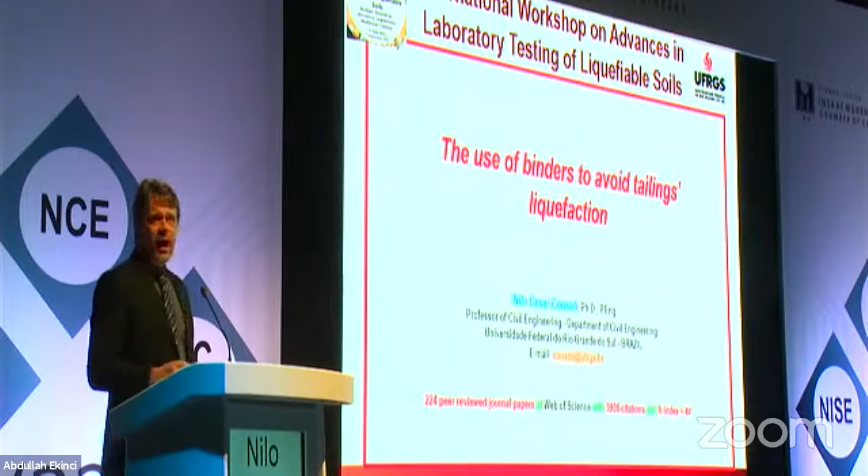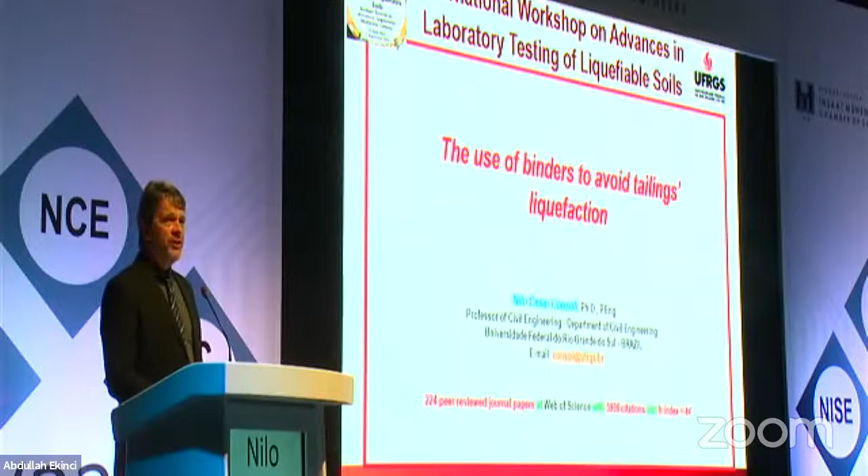And I'm going to show you the problem and the ways that we are trying to solve it. Just for you to have an idea, we have about 800 upstream dams in Brazil, and a lot of them have a safety factor of nearly 1. So we have to decommission all of them, and there is a law that was introduced after the last failure that killed 250 people or more, that forbids, from 2020 on, raising new upstream dams.

So, as I said, we have 800 and we have to decommission them, and we cannot build new ones. They are the cheapest, that's why they were used, but now it's not possible anymore. That's the reason that I'm going to present to you the problem and possible solutions for disposal of new material and ways to decommission these tailings that still have some problems.

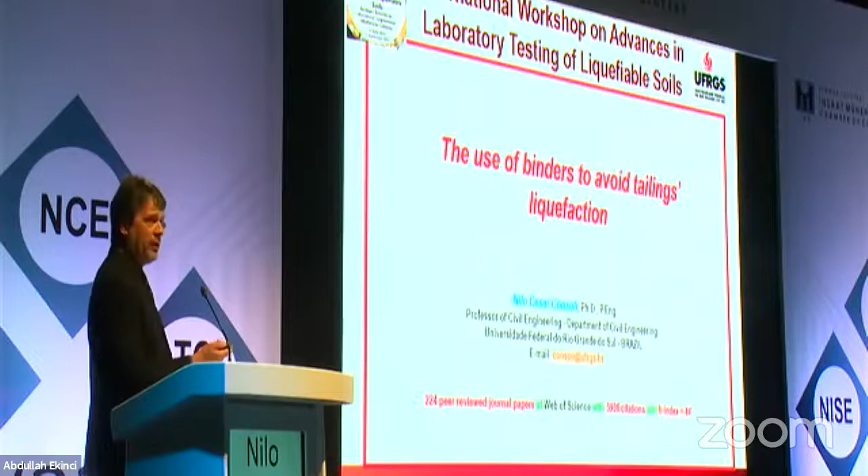The first thing, just for you to have an idea, I have some experience with tailings dating 30 years ago in my PhD in Canada, in which the problem that we had at that time was completely different than the one that we have nowadays. At that time, we didn't know how to manage the volume of tailings that we could dispose behind a dam and a reservoir. So my PhD was regarding this kind of solution, a numerical solution.

So I worked in the development of a constitutive model based on critical state soil mechanics with a former student of Roscoe from Cambridge, Professor Poorooshasb. That's why I chose the university, to work with him. He was the one that started to look at sandy materials from the critical state soil mechanics side, because Schofield, Wroth, and all the others looked mostly at clay materials. That's one of the reasons, because in tailings you have silty and sandy material. So I went after this problem.

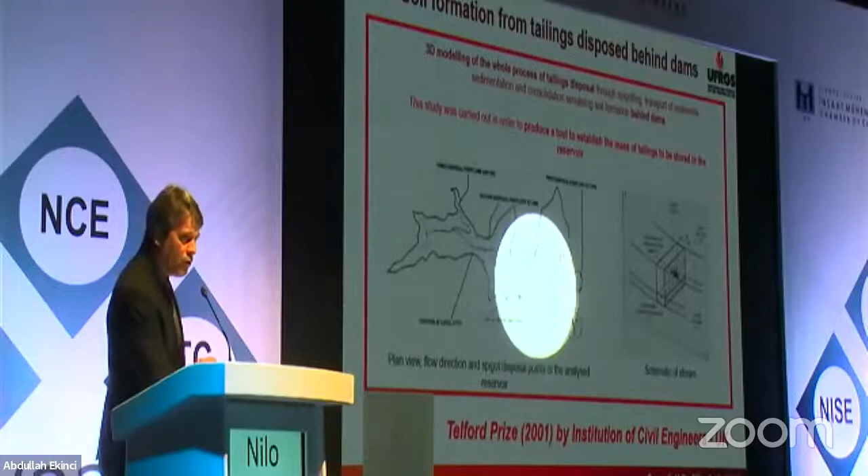And in the end, I published a paper. It was basically a real problem that we had with bauxite tailings, where this slurry was disposed at some point like here, and it starts to be taken by the water, and so you have sedimentation and also consolidation, everything occurring at the same time. So we had to solve it numerically.

At that moment, and even nowadays, you don't have an analytical solution for it. So I had to develop two codes, one in finite difference to deal with the sedimentation, and after that the large strain consolidation.

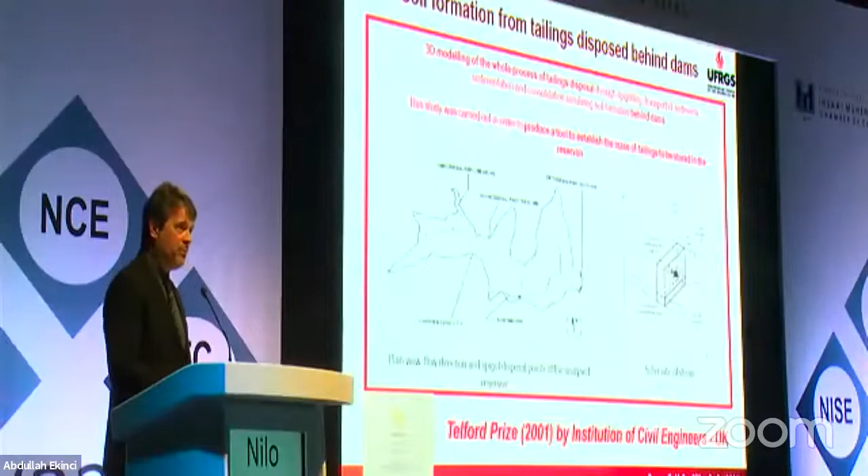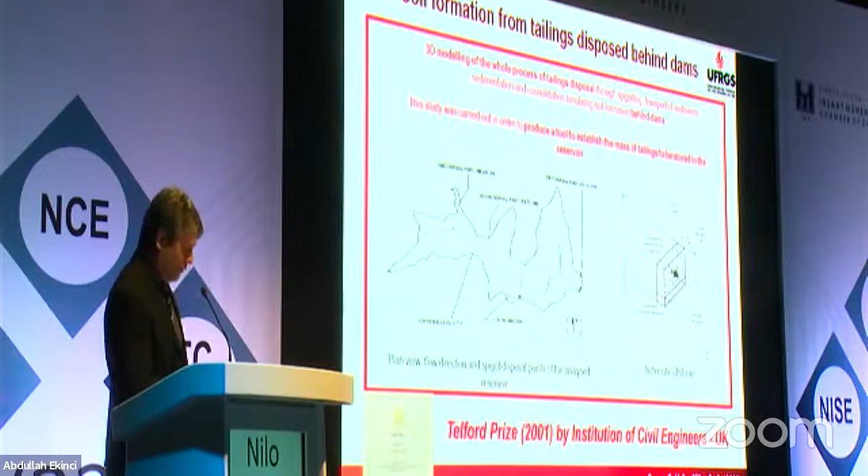And my first paper was published in Géotechnique in the year 2000, and I was lucky to even get a prize for this paper, which was fantastic when I started, just to have it recognized as a good solution for the problem.

Just for you to have an idea, when we're dealing with this bauxite tailings, these dots are results of the void ratio with depth. And the solution, it was a one-dimensional solution, but in the end, at one point, we got this dashed line here as the numerical solution of the final void ratio. So it started with a void ratio of 6 at the top, and it ended with a void ratio of about 3.

So we are dealing with a pretty problematic material if we have any kind of quakes or so, which is not common in Brazil, but even static liquefaction, as we discussed in the last period, we might have problems with this kind of high void ratio and such a material.

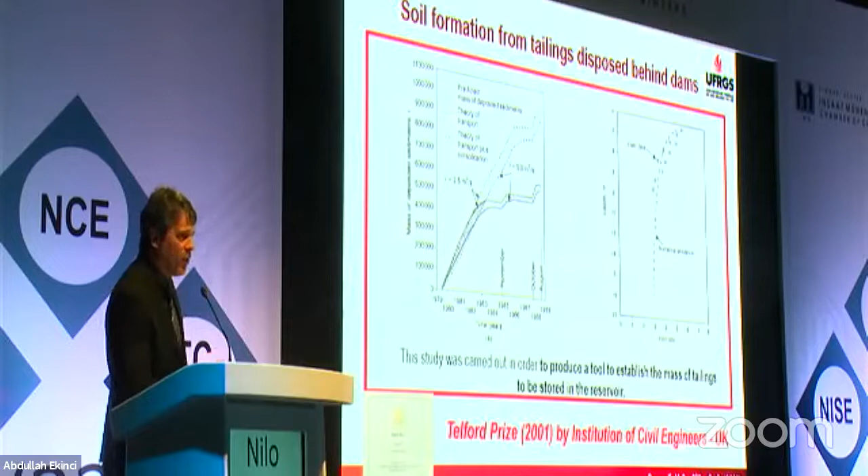But what is interesting also to see here is that due to transport of the material and just sedimentation, we could solve the problem saying that we have a possibility of putting like 500,000 tons of material behind a dam in a reservoir. But if you consider the consolidation, the real consolidated height, considering small, large strains and Eulerian or Lagrangian viewpoints, it almost doubled, and that was what really happened. Almost double the amount of material that you could put behind that dam.

But as I said, this is just the first point that we have had. But recently, as I told you, and this I brought just for you to take a look. This is an iron ore reservoir that was raised with the upstream method. And in 2019, we had the failure. So these are just the sequence of it. And in this one, we had more than 250 people killed. And everything changed from that moment on in Brazil.

Because of that, if possible, there's a link here where you can see the video of this failure. So I just took some pictures to show you what the problem was and why it is forbidden in Brazil to do such a disposal from then on. So as I said, we had to start thinking about novel ways of solving the problem.

And so at that moment, Vale, which is the biggest mining company that we have in Brazil, approached me at university because they wanted to look for solutions using dry stacking, which means you filter the material, the slurry, you get it to a certain moisture content, then you compact in layers, and then you can do, as they expect, these dry stacks up to 300, maybe 400, even 500 meters high.

But then there's also the possibility of adding some cement and starting to compact and going up. Of course, depending on the amount of cement and the level of stresses that you're going to have due to the raise of this stack, you might have breakage of the cement bonds in the layers below. And as I said before, you might have breakage of the particles, mainly the sandy particles. So this is still something we have to understand better, how it's really going to change due to these particularities that we have for such a solution.

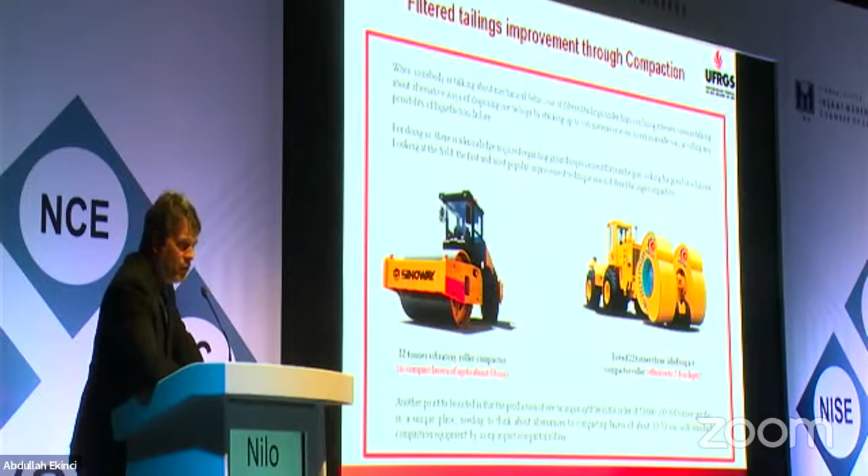But I'm going to show you some of the problems that we are already starting to look at for this solution. The first problem is a practical problem that was raised for us: do you have any problem due to compaction? For example, might you have some breakage of the sandy particles due to high energy, because the equipment that is supposed to be used in the field, and they are already doing it, has huge energy and high frequencies and so on. Would that make any difference regarding possible breakage of the particles?

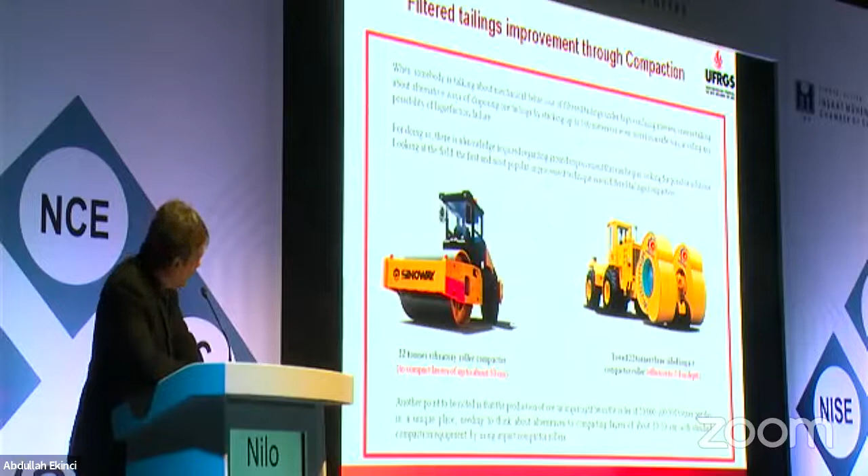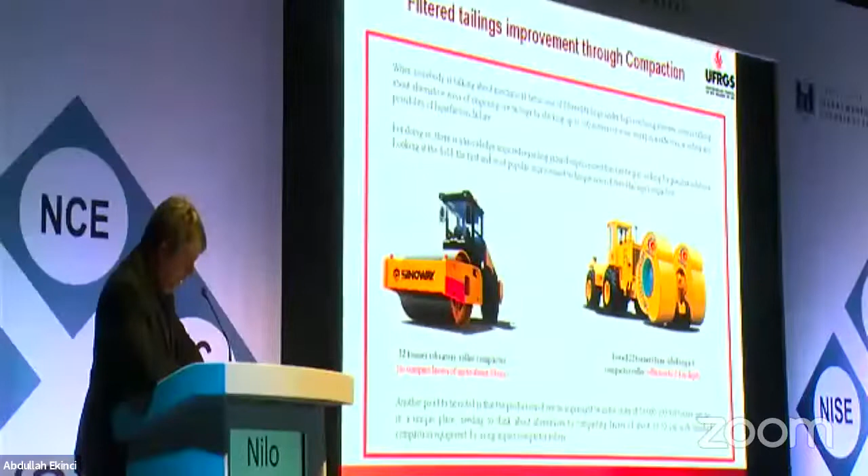We are studying that, and we have done some tests for two different pieces of equipment, in the lab and also in the field, to check it out. In this case here, we have a 22-ton vibratory roller compactor for compacting up to 50 centimeters. And in the other case here, you have an impact roller to compact thicker layers and see what is going to happen. So this is ongoing research that we are doing, and this has not been shown before.

We're still writing something about that, but at this moment, for iron ore tailings in this case, we could not find breakage of the particles due to this compaction, applying the energies that we might have, cyclically or not, up to reasonable pressures. These particles are mainly silica sand, and so they do not break. However, we applied much higher pressures than the ones that you might have in the field, and then, yes, you do have breakage, but that's not real.

We had to check if it was going to occur and which were the pressures to do so. But the good news for Vale, which was paying for this research, is that for the usual pressures that you get from these equipments, you don't have a change in the size of the particles due to compaction for this material. This is something good technically for them.

Okay, but what about if we are looking at real high pressure due to the stacks being 300, 400, or even 500 meters high? What's going to happen to the material that is below when you are raising it? This also hasn't been shown anywhere. It's just an initial result, in which we have two different materials. Both come from iron ore tailings, but they are retrieved from the process at different moments. One of them is mainly silt, and the second is mainly sand.

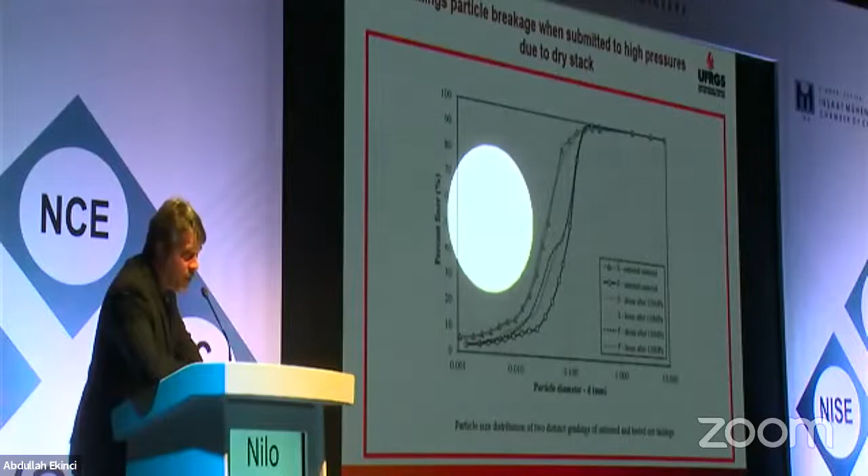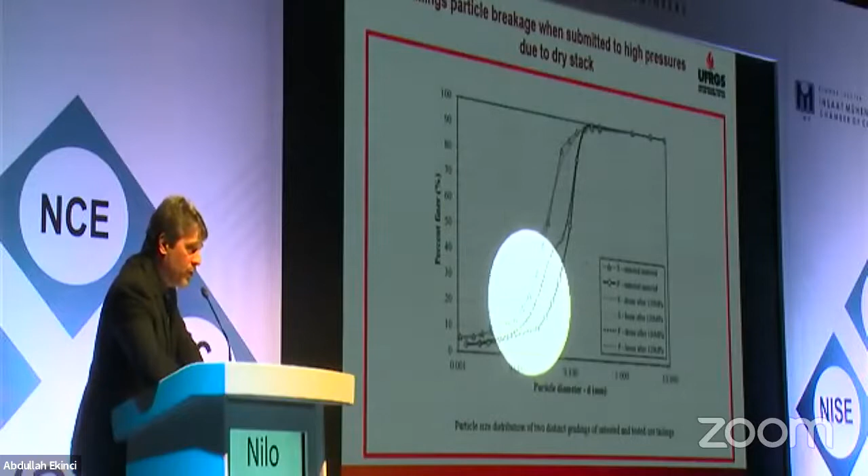These on the top are the results for the silty material, which are similar before and after applying such a high stress like 120 megapascals. But here in the bottom, you have the materials that were compacted initially in a dense way or in a loose way, and in both you have breakage of the particles, and so you have smaller size particles. And we are looking, of course, at the real situation too, and that's still ongoing research.

But as I told you, the concept that we have in Brazil, which differentiates from 2020 and on, is this idea of using dry stack. And in such a case, at this moment, they have already decided that we shall go at least to 300 meters high in stacks, which, as I told you, we have some specific knowledge that still has to be studied. There are some points that have to be clarified about possible particle breakage and other points that you might need to understand it all.

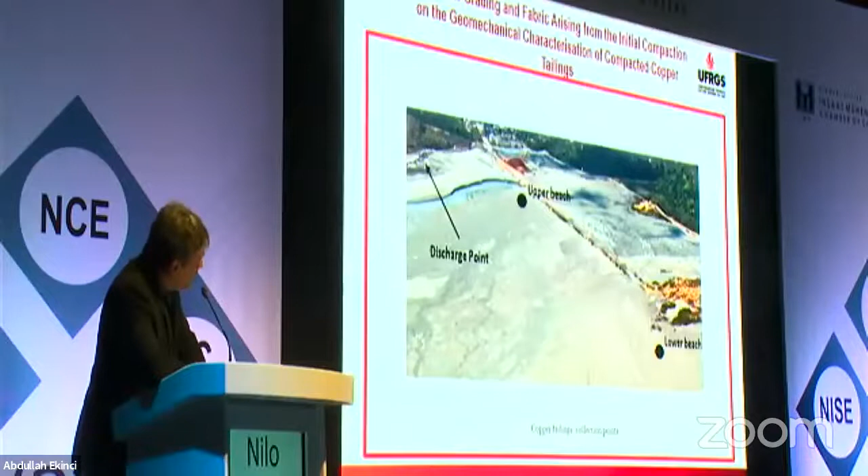Here is a paper that was just accepted at Geotechnique. It's still not printed, but it's going to be soon ahead of print, in which we have a decommissioning kind of problem. So this is a reservoir for a copper tailing, and we have got specimens from, here's the discharge point, from what we call upper beach and from the lower beach. Of course, the difference is basically the size of the particles: in the lower beach, due to the transport of sediments, they are smaller than the ones in the upper beach, which is interesting, and we see here just the difference. Both are silty sands, but they have some differences in the amount of silt, basically.

Here we have plenty of results, drained and also undrained, and we have analyzed these results, in this case here, just for the upper beach material. We have made the decision of looking at 3 different compaction energies. So we have different densities of initial void ratio. So in 3 different ways, and we want to look at the influence of the void ratio regarding liquefaction or things like that, what is going to happen, and also from the critical state soil mechanics viewpoint. What's going to happen?

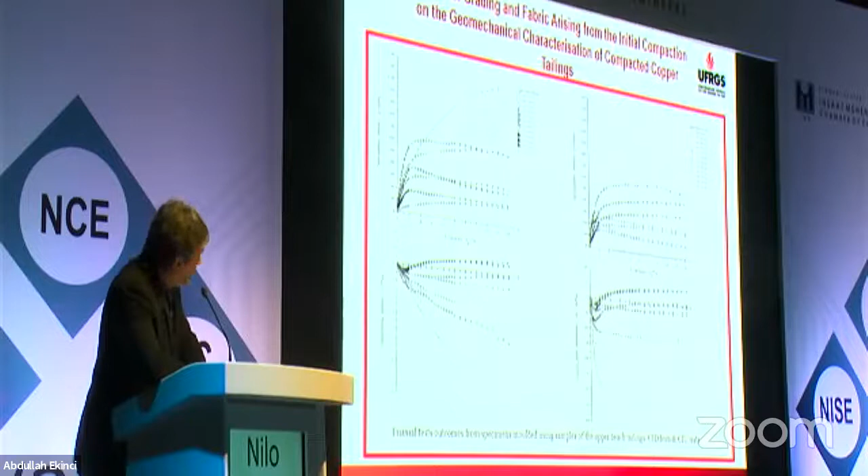Okay, this is just the isotropic results from these specimens. These on the top have a void ratio compared to about, if I'm not wrong, 86% of the maximum density, and these are just the isotropic points in the beginning of the shear, before shearing it. So what is interesting is that this is for 86% of the energy that is applied, so a lower density. This is an average density, which is 91% of the maximum density, and this one is for 95% of maximum density. Anyway, we have 3 different straight lines. At least we have approached to this.

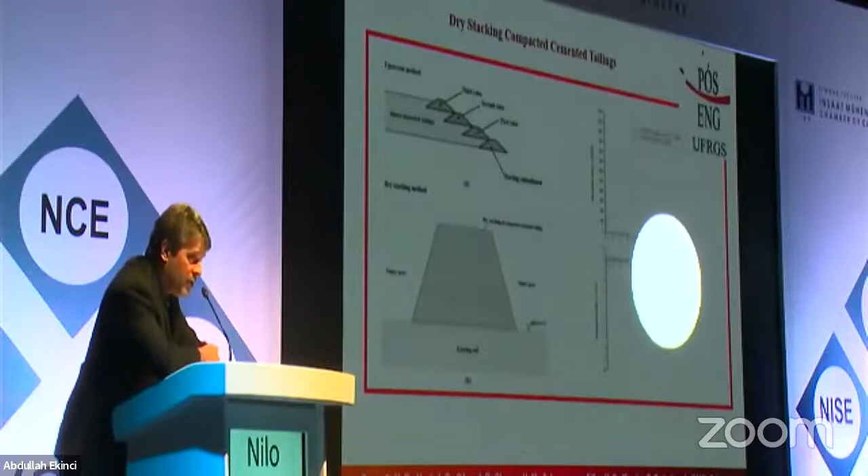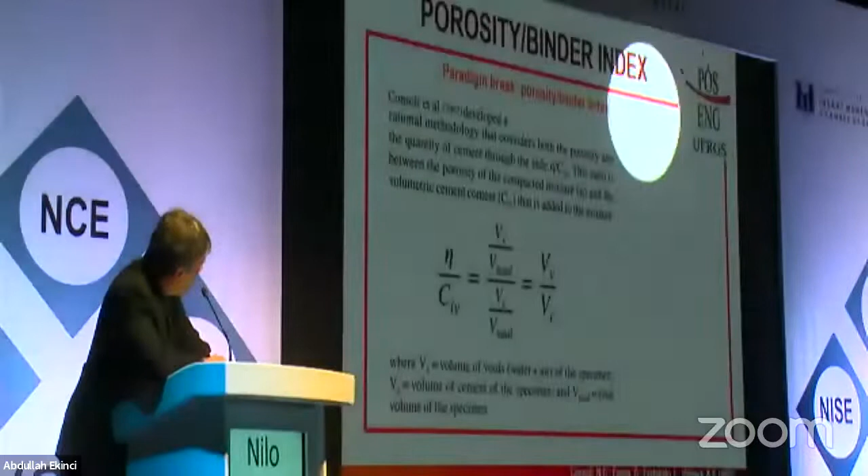Here's something that I know Abdullah and some of the people here from Turkey and Cyprus and some other places in the world are already using. As I'm going to talk a little bit about cementing the material, it's interesting to show the concept of this index, which is porosity divided by what we call the volumetric amount of cement, the eta/Civ. It started with some research in the middle of the 2000s.

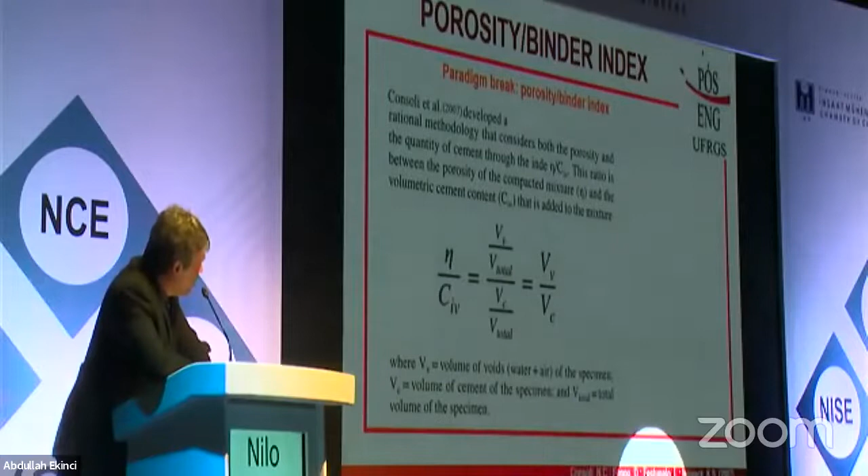This paper from 2007 is the most cited paper that I have. It was published in the Journal of Geotechnical and Geoenvironmental Engineering, and at this moment it has 313 citations on Web of Science. And what I'm going to show you now is that this index controls unconfined compressive strength, splitting tensile strength, initial shear modulus, initial bulk modulus.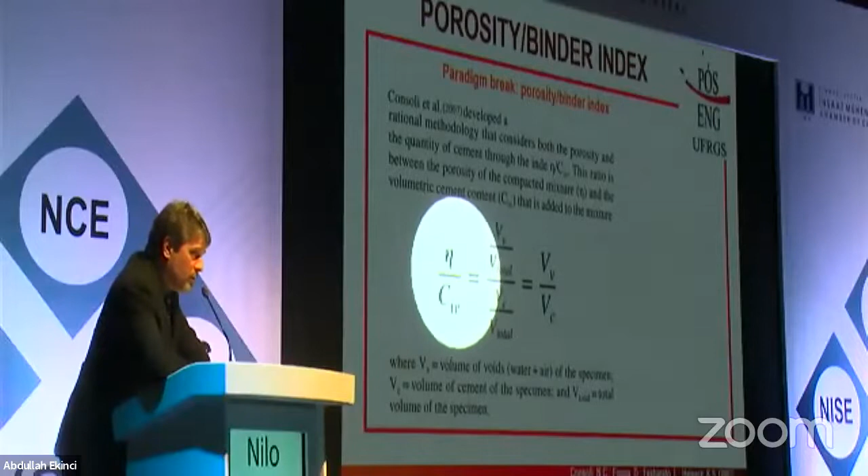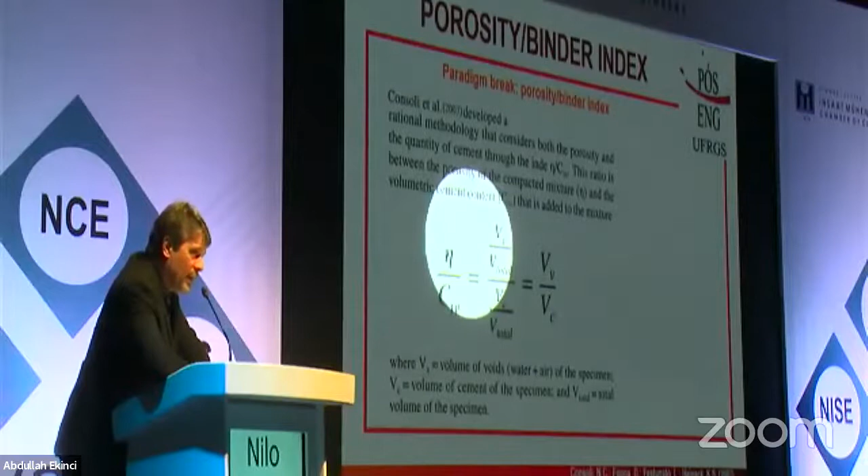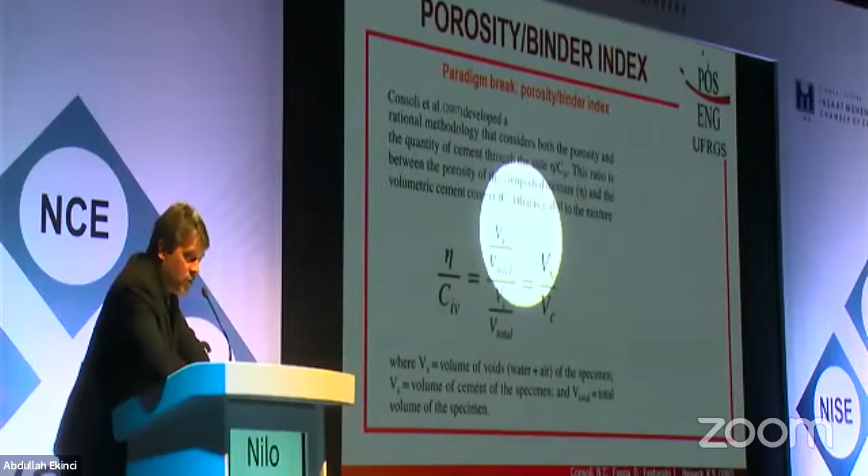It controls the peak of triaxial tests. It controls durability, the loss of mass. It controls the expansion of clay that has some expansive minerals. We can also control the amount of expansion that you might have through this index. Here are just some basic ideas that we have, just the concept of how to look at it.

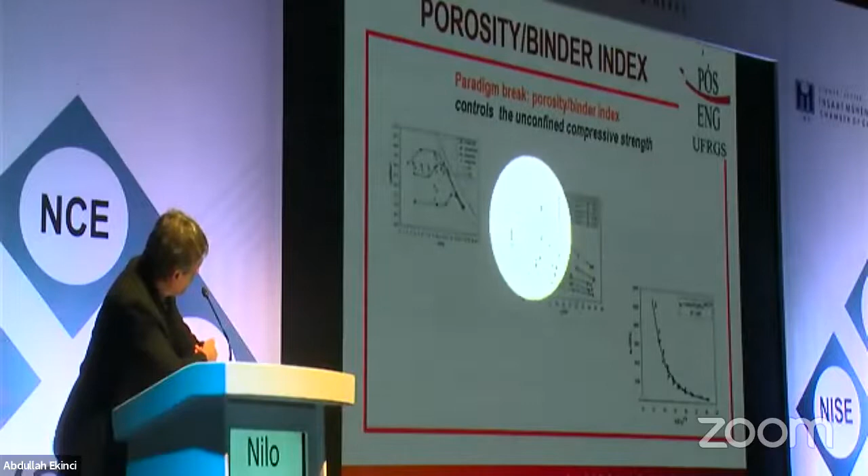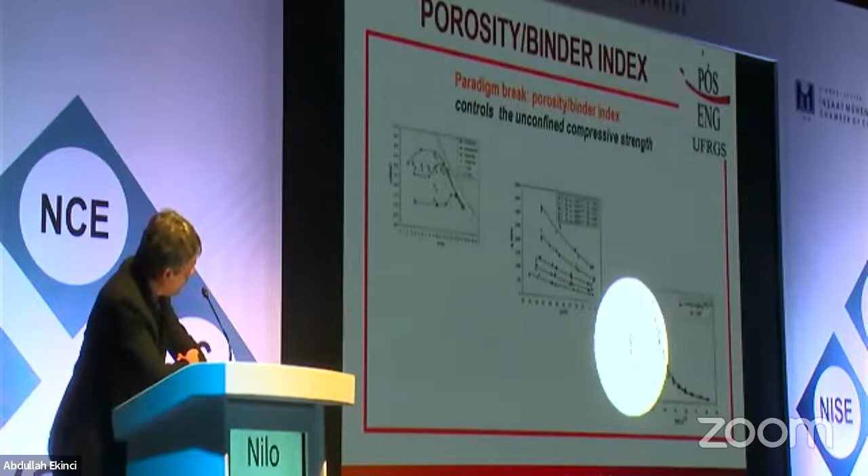For example, here are several energies of compaction. We can make some molds at several points. We get, for example, with several amounts of cement, the unconfined compressive strength as a function of porosity with different amounts of cement. But in the end, what we show is that with that index, the unconfined compressive strength can get to a unique line. Okay.

Here is joint work that was carried out with the University of Bristol, with Professor Erdin Ibraim, Professor Andrea Diambra, and myself, in which the study was to have some analytical basis for that index, because we knew experimentally that it was working. But with this and some other further works published from 2017 on, we have the analytical proof for why that index really controls these cementitious materials. I'm not going to enter into details, but as shown here, it was published in the Journal of Geotechnical and Geoenvironmental Engineering in 2017.

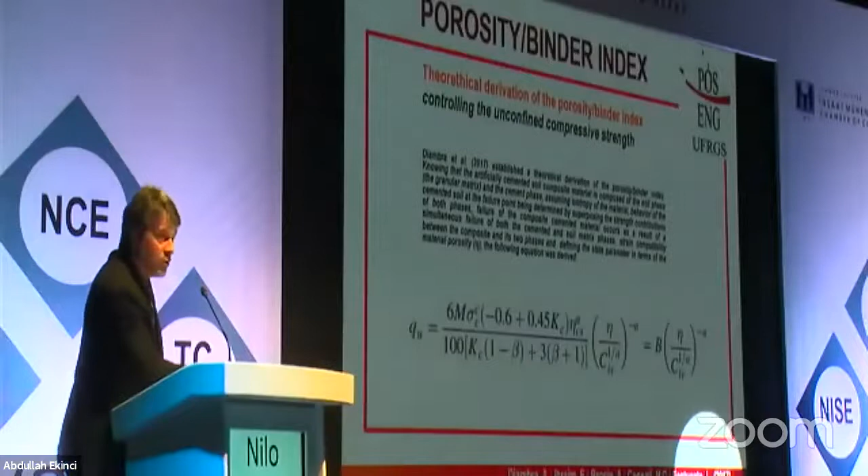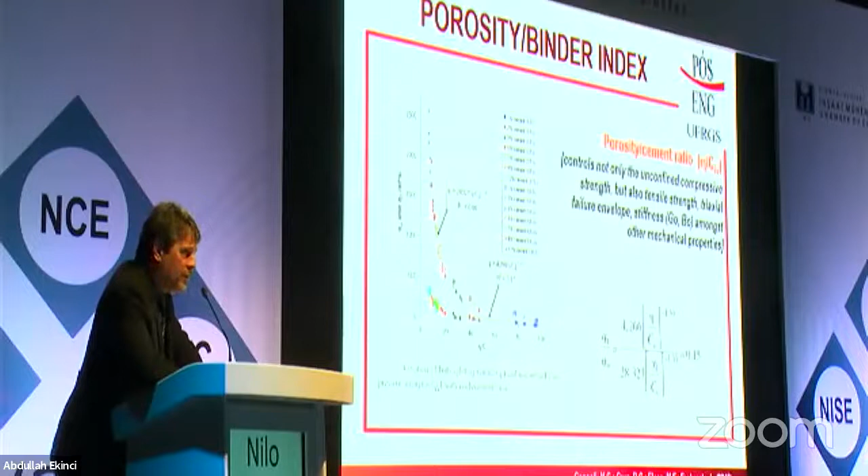This is also a paper from the Journal of Geotechnical and Geoenvironmental Engineering from 2010, in which for the first time we showed that for the unconfined compressive strength and also the split tensile strength, using different void ratios and different amounts of cement, you would get a unique curve for unconfined compression and a unique curve for tensile. And if you get these curves and divide one equation by the other, you get a scalar that is unique and doesn't change with the amount of cement or the density. So it's quite interesting. As I said, it was published in 2010.

Let's go on. This is a paper published in 2012 in Géotechnique, in which we introduced for the first time the concept that the initial shear modulus, measured through bender elements or ultrasound equipment depending on where you are doing it, is also dependent on this eta/Civ index.

So you have different materials: these were sandy material from Brazil, and this was a sandy material from Portugal. They have been tested by different people, but as I said, you have a unique curve for one material with one cement, and for the other you have another curve. But each curve is, as I said, controlled by this index.

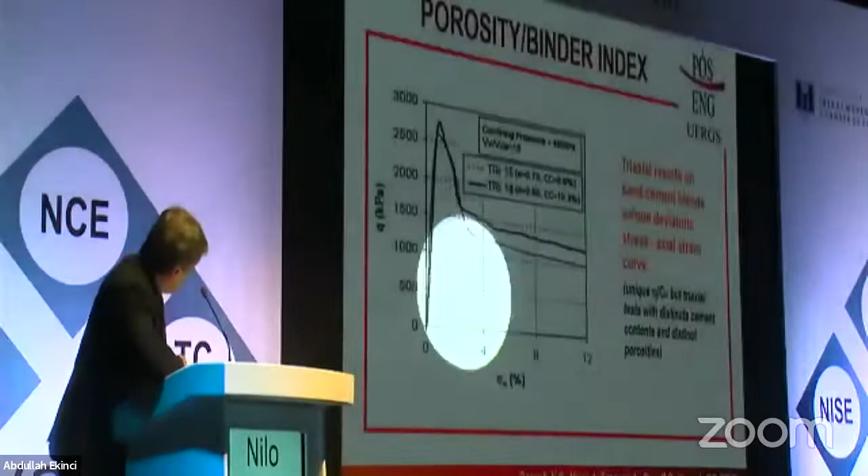Here is something also interesting that was published in 2009 already, showing that if we have, for example, these triaxial tests that were molded with different void ratio, different amount of cement, but the same eta/Civ, the same index, under a specific confining pressure, they have the same behavior from beginning to the end. You can see the whole curve is the same, even though the void ratio and the amount of cement of both specimens are different. However, they have the same index.

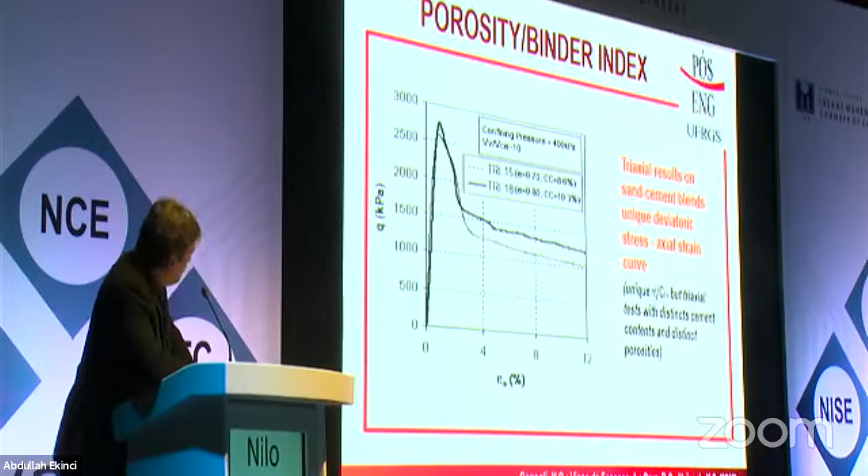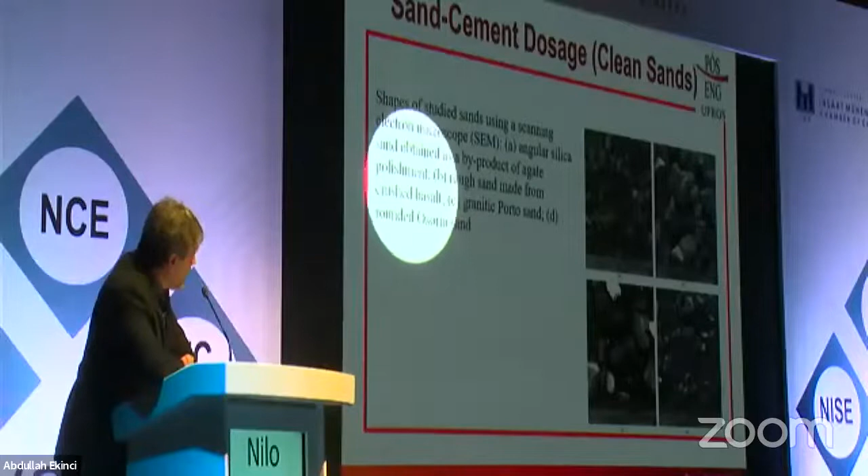This is also something that was published in the Journal of Materials in Civil Engineering from ASCE in 2017, in which we have shown 4 different granular materials. Some are man-made, some are real ones. For example, this is a material from Porto. This is Osório sand from Brazil, and these 2 materials are recyclable residues of the polishing of agate, which is a kind of stone, and also some materials based on the rest of crushed basalt. But anyway, they are all sandy-size particles, but they do have, as we can see here, quite different angularities and roughnesses too.

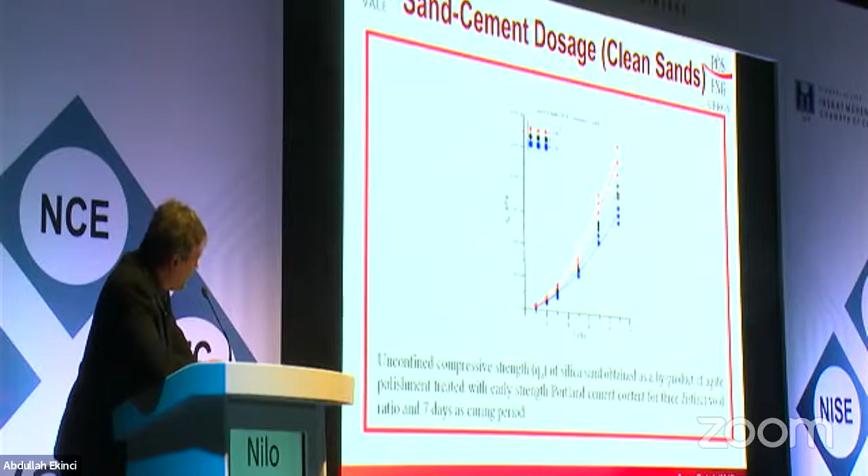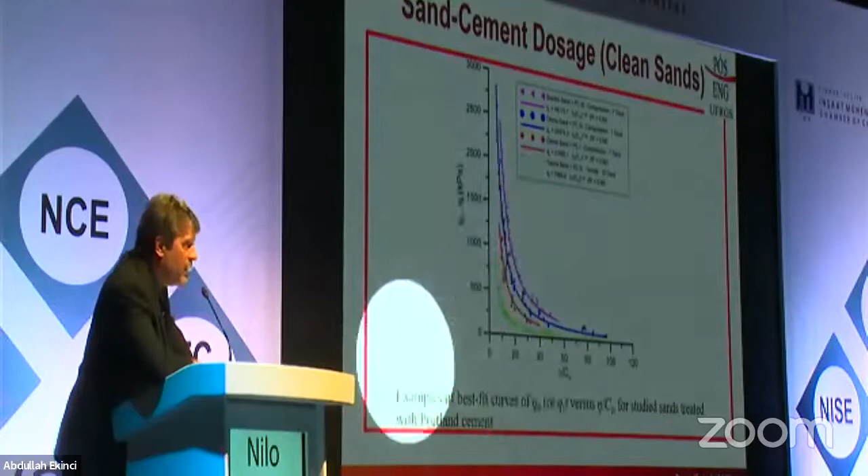Okay, we have tested basic tests such as unconfined compressive strength and splitting tensile for these materials, and for each one of them we have used different cements, different amounts of cement, different densities, and so on. We can see here some results: this green one here are the results for several amounts of cement and several densities, just the splitting tensile strength, and we get this unique green curve. And the other curves, the red one, the blue, magenta, are the other materials from those four materials with different amounts of cement. As I said, this green one is splitting tensile, the others are unconfined compressive.

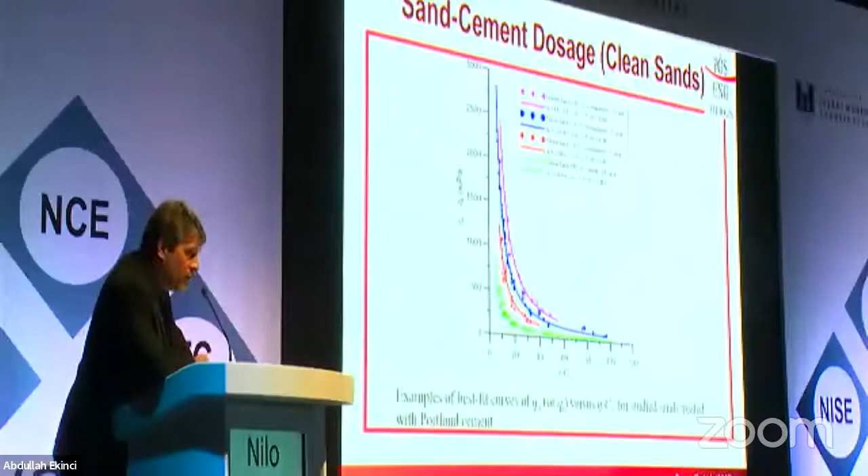What we did here, to have a possibility of normalizing it, we have divided each one of these curves by the result that we have of the qu or qt, which are the unconfined compressive strength or the splitting tensile strength, for eta/Civ 20. So we take 20, see where it meets the curve, and divide the whole curve by that. Doing so for each one of these and many others, we get a unique curve for different sandy materials that I showed you, with different roughness,

different shapes, and so on, which is interesting for practical reasons, because in the end we can show that we have a unique normalized equation here, so that if you have carried out one result, for example, with a specific porosity and a specific amount of cement, you can get the whole curve doing at least one. Of course, you usually repeat it 3 times to have an average, but we can, because the shape of the curve does not change. That's quite nice for practical purposes.

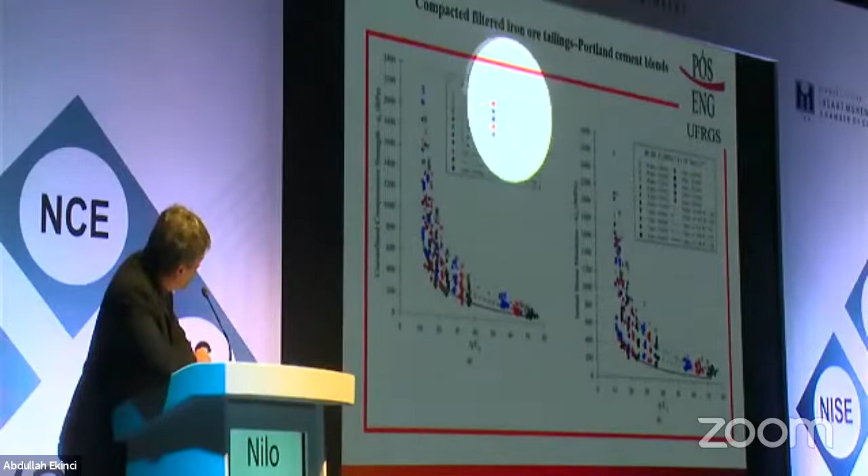So these are results for several curing times. Each one of the curves is for a different curing time, with the unconfined compressive strength for this iron ore tailings with Portland cement, and this is G0, which is the initial shear modulus that we have had. This is the idea of the accumulated loss of mass versus also this index, which we show that it works.

Let me go faster. Here are just some triaxial tests with this material with a specific amount of cement, but 2 different densities to see how they do work. We can go on. Besides that, we are also searching for novel kinds of cement that are made of residues in order to reuse these tailings, and maybe even using residues from the tailings. We can make cement, for example, sodium silicate, using the silica from the iron ore tailings. We are doing so, and we have been successful in getting it stabilized.

So this is just the concept of what we are doing: looking for several residues in order to build brand new cement types that can reduce the price of the cement and be more sustainable, in the sense that you are using the proper residue to stabilize the material. We are also looking at sustainability, because so many people talk about sustainability without looking at the numbers. We are looking at it from the environmental, economic, and social viewpoints to show if such a solution is really sustainable or not.

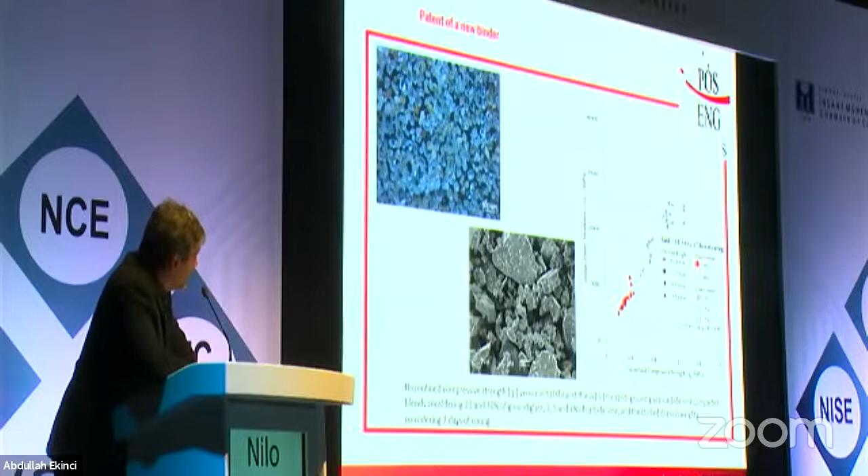Here, this paper was published in Géotechnique showing that this cement works for different materials, basically sand materials. Here is the same concept. And this is interesting because this paper was published in the Journal of Geotechnical and Geoenvironmental Engineering in 2021, in which we used for the first time in a geotechnical solution the idea of alkali activation. In this case, it was sodium hydroxide, added to lime and some amount of ground glass.

What is interesting is that it gets much stronger, and quickly stronger in a few days. The stiffness is higher. So different cements get different results. This is a paper published in the Journal of Cleaner Production in 2016. We have others showing the sustainability viewpoint: when looking at the environmental side, most people just talk about one of the several points we have to look at. From the environmental side, you have embodied energy, acidification, global warming, and so on, and we have been showing what's going on for each one of these for some solutions we carried out.

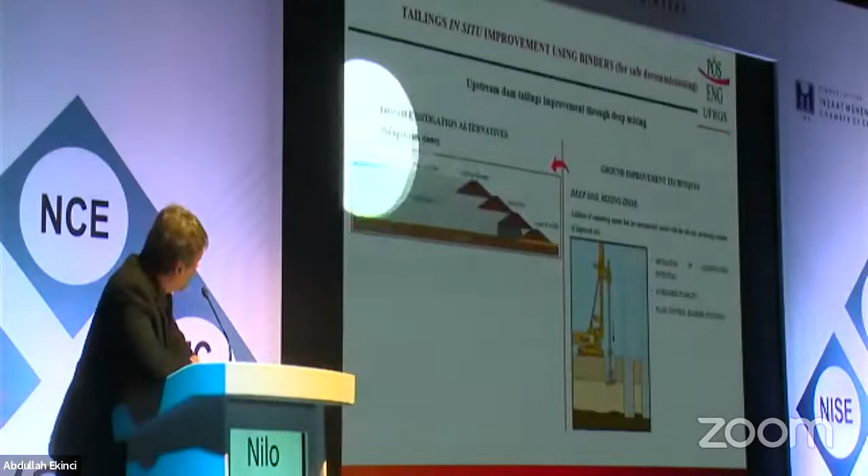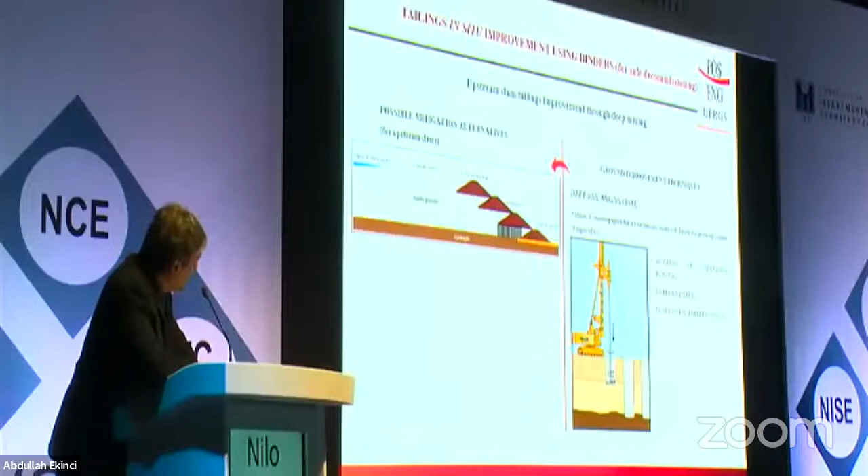So just to finalize, regarding decommissioning: in Brazil, all the decommissioning of the tailings is being done by retrieving the whole material from behind the dams. Here is a suggestion that has just been accepted for publication in the Journal of Materials in Civil Engineering, to be published in 2023. The concept is, if you have this problem with upstream dams, improving it at some points to mitigate it with deep soil mixing or even shallow soil mixing. You can see here you already have the DOI, but it's not online yet.

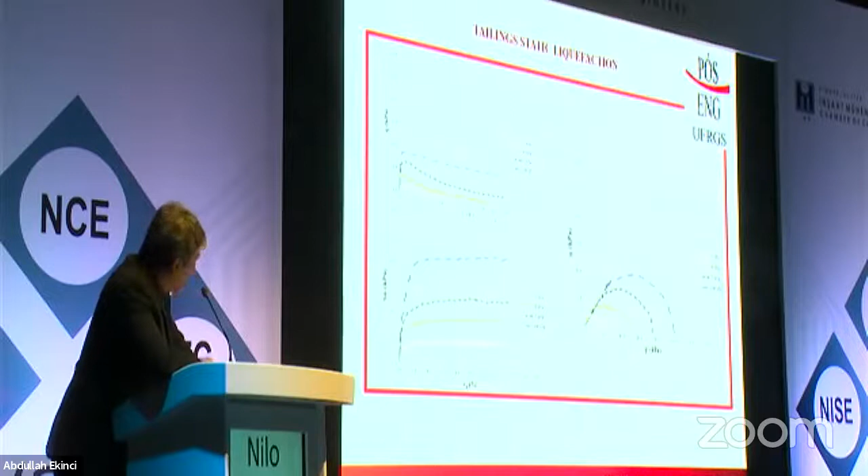These are some results that are interesting regarding static liquefaction that has occurred for these materials. These are gold tailings in a very soft disposal. And here we tried to mix in the lab with different amounts of cement, from very small amounts to large amounts. And here are some results for this cementation that we have.

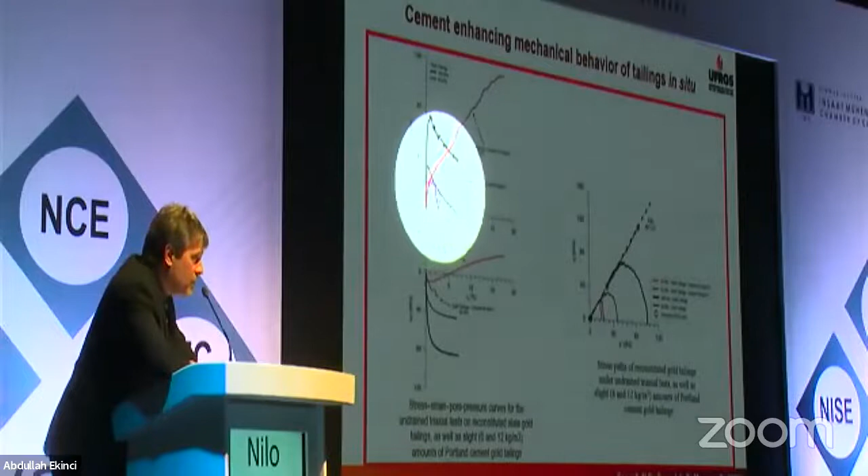But what is more interesting, I think, from this paper are specifically these figures here. For example, here you have this dark result that is the material without anything, with high void ratio, and it liquefies when you are shearing it. We have added 6 kilograms per cubic meter of cement, and it continues to liquefy. And we see in this figure the liquefaction occurring. But when we put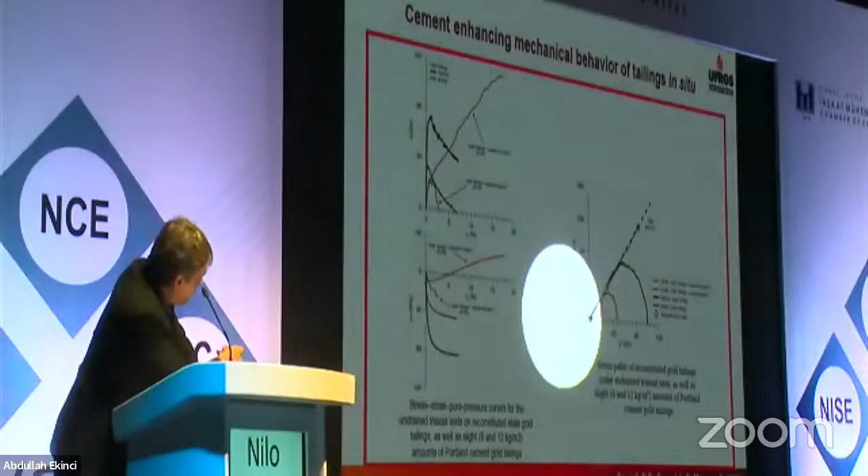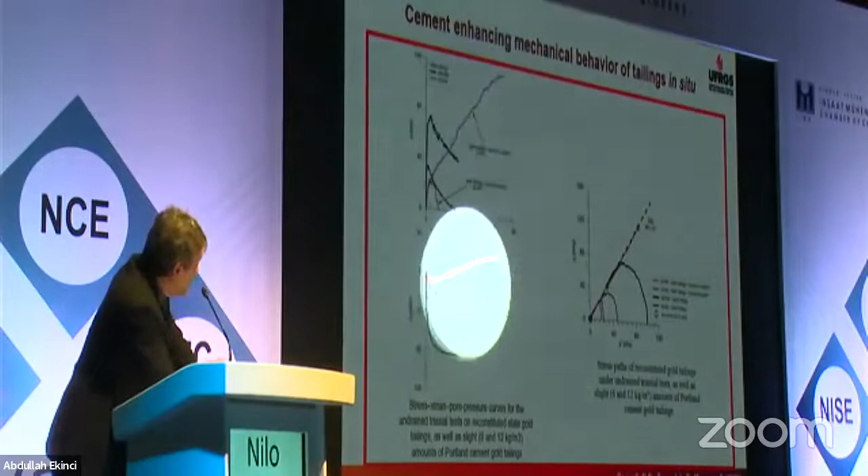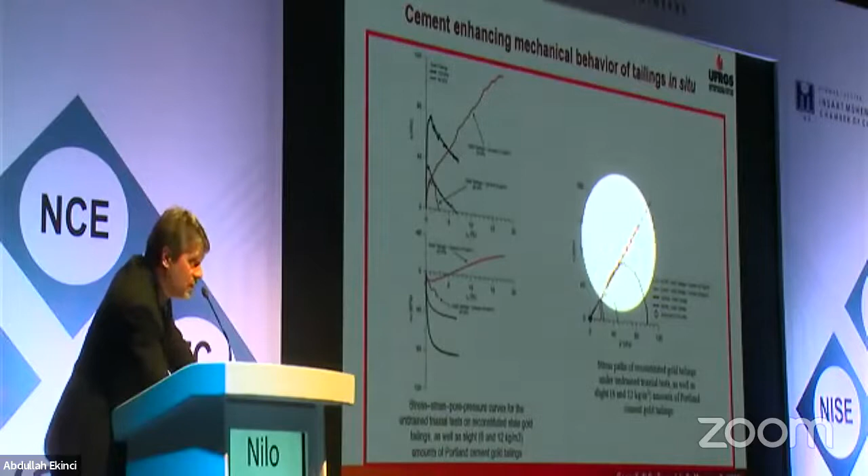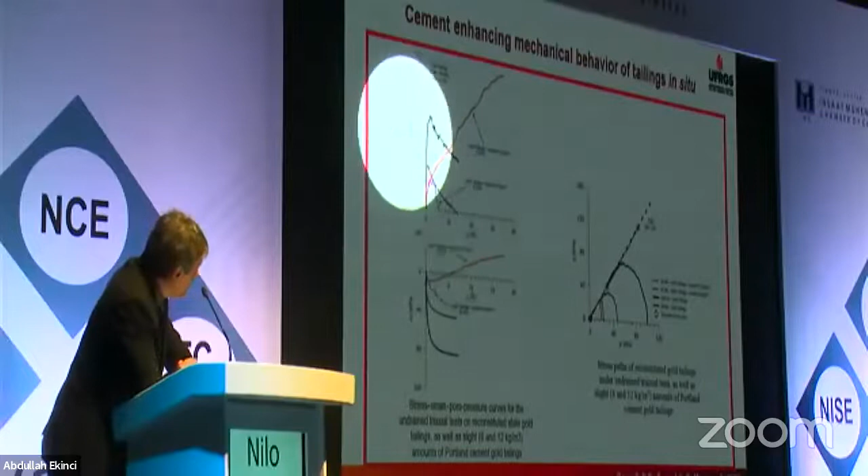12 kilos per cubic meter of cement, instead of liquefying, you see this red line here, the stress-strain, and you see here the dilation, or in this case, the production of negative pore pressure, completely different due to a small amount of cement. But in this case, we can also see that the critical state line does not change. This is interesting because in the end you get the same critical state line; some liquefy, but this one, with 1% of cement by weight regarding the solids, turns the material not to liquefy.

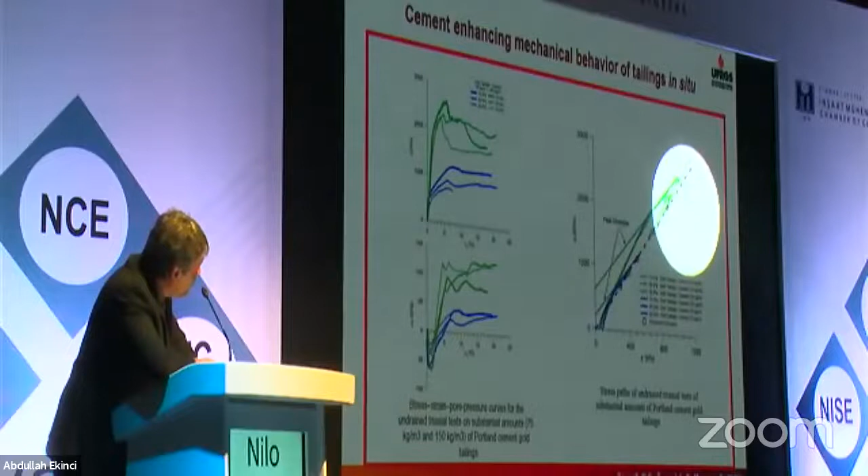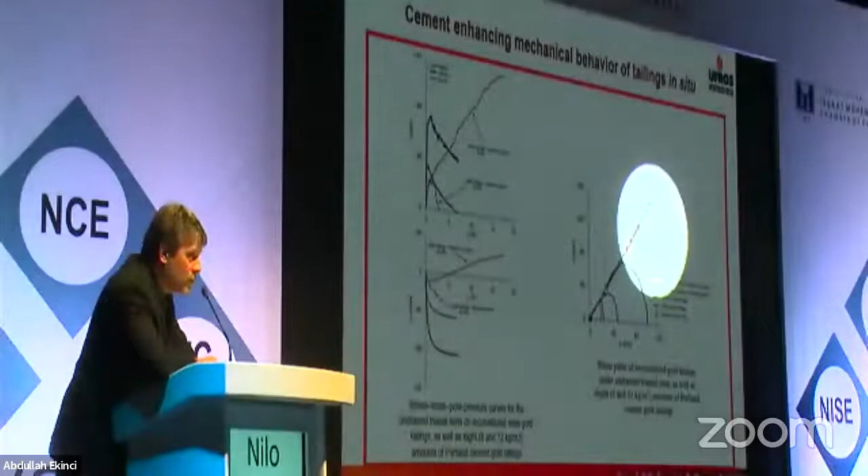But when we add a much larger amount of cement, depending on the amount, 75 kilos per cubic meter is these blue results here, and 150 kilos of cement for the same material. You have a larger strength, but both come to a unique critical state line whose M is 2.36. This value is much higher than what you have in the beginning, which is just 1.41. So you change the material completely with high amounts of cement. That's why you have different critical state parameters too. So this is just to finish, and thank you very much.